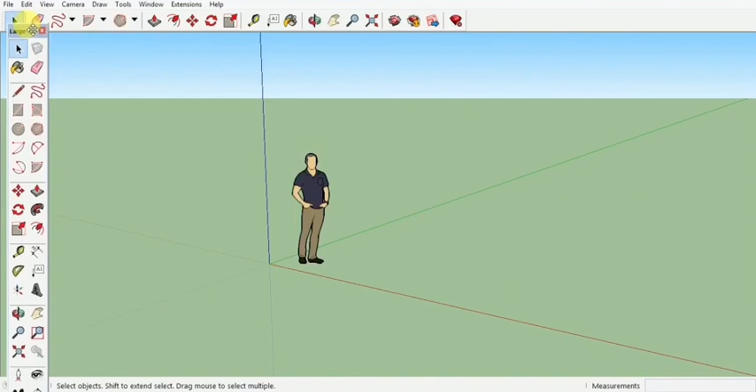Before I get into it, you'll notice this panel is not yet docked, meaning it's still free to move around. To dock it, we move it to the side and you'll see how it fits easily. This is how we dock it so we can work in it rather than it moving around everywhere. If you want to change its docking position, you can see these lines we have. We can hold it from the line and dock it anywhere else, either on the left side or the right side.

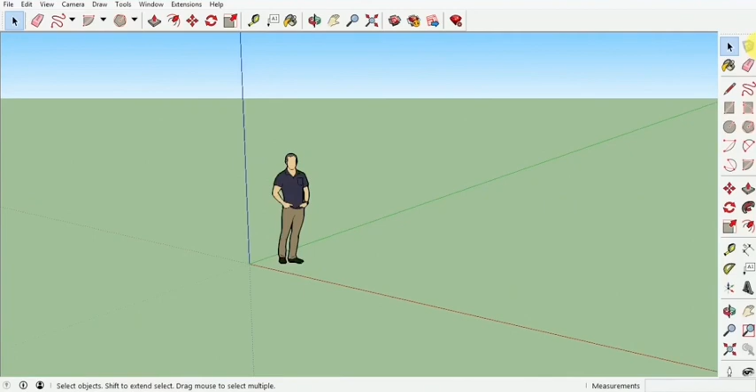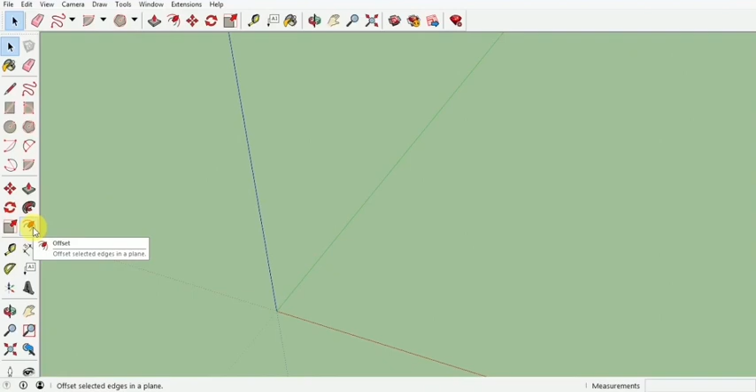Once I've finished docking it, we'll get into what the next tool set is about. I'm going to delete this person from here and get straight to the tool set. The first one here is basically the move command, then we have push pull, rotate, follow me, scale, and offset. For this, I'm going to use a rectangle, creating a random one so we have an object to work around with.

Now the first command here is the move command. The move command will let us move this object or shape around.

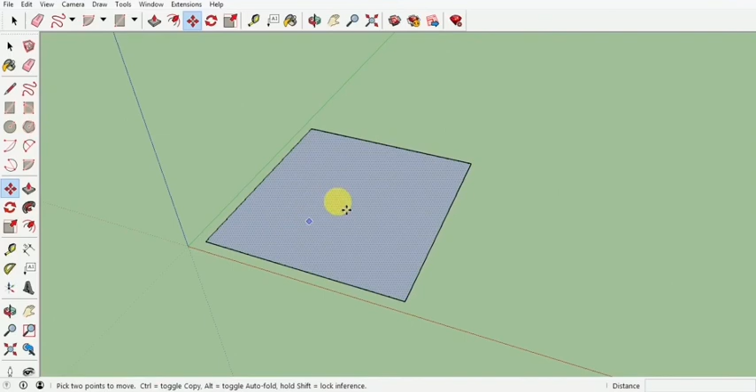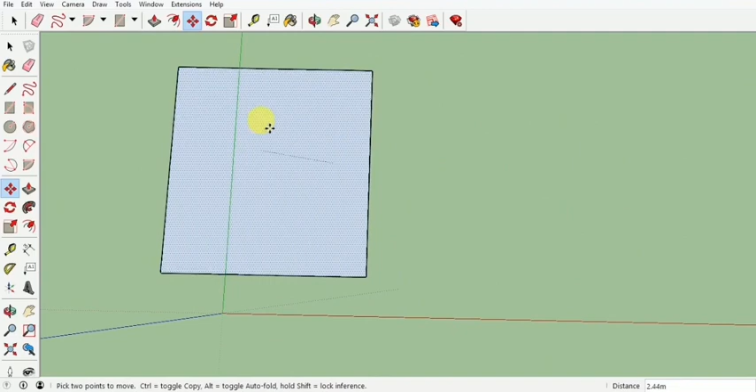You have to understand a couple of things when using the tools for a particular method. If we move this shape from the surface, the entire shape will move. But if we move it from one of the corners, the entire shape will not move, only that corner and the lines touching it. If you've understood this, the surface is touching all the edges, that's why the whole surface moves together. But when moving from this edge, the edge is only touching the surface as well as both those edges, so only the edges touching it are actually moving, and your form starts to get deformed.

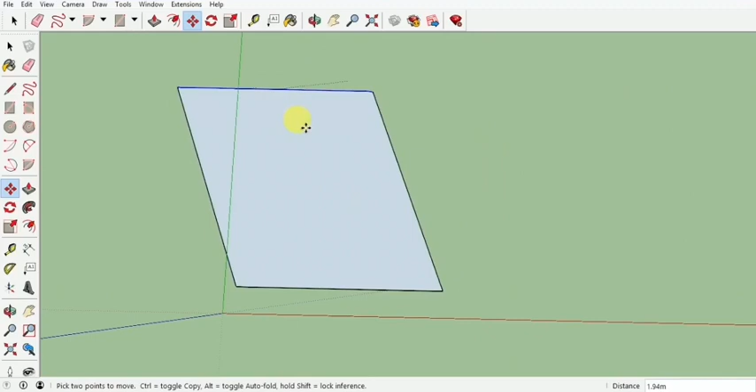If I move it from this line, then only this edge will move along with the two edges touching it as well. This is what we need to understand before moving something. So we can select with the select tool the whole thing so it's completely highlighted, or do a double click selection on top of the box, then move it from wherever we want. That would be a proper movement. I hope you've understood how to move this around.

The next thing we're going to learn is how to copy. We've learned how to move this, now we learn how to copy it. Remember, while moving it, we can always select the axis keys to move it in a particular direction, and we can use a particular distance also, let's say 5 enter, to move it 5 meters.

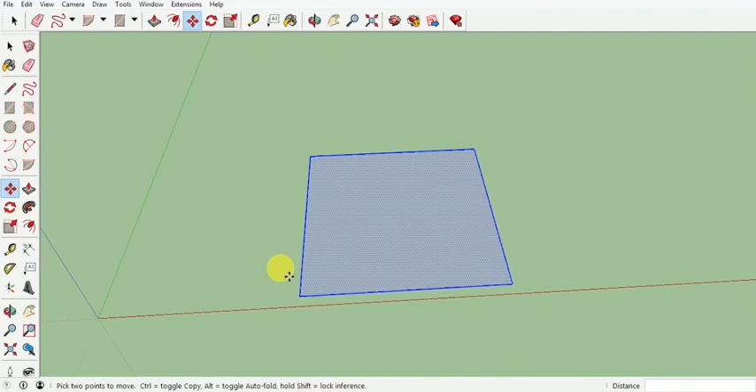To copy it, it's exactly the same as move, using the axis and giving a dimension, but for copying we press Ctrl. When I press Ctrl, you'll notice there's a plus sign there. We don't need to hold Ctrl, there's a difference between holding and pressing it. Holding Ctrl holds it down, but pressing Ctrl just switches it off and on like a switch. So I can press Ctrl, and when I see the plus sign, I can select it from any point I want to copy, let's say from here, and copy it to this side or to this side, like this.

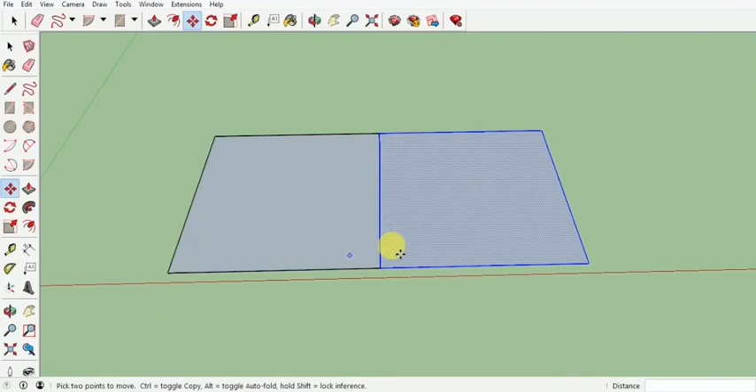The minute it's copied and I set the copy, you'll notice it copies on this side. I'll do that again, and again, so you can see I've copied it 4 times now below. But if we can copy, we should also be able to array.

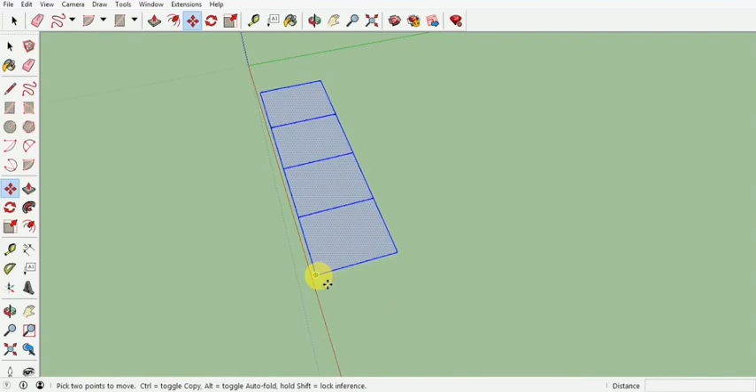Array is basically copying a specified number of times by giving a count. So I'm going to select all 4 of these rectangles, and using the move command, I'll first press Ctrl and copy it. The first step to array is to copy it, which means setting a distance for it. You can see 6.29 is the distance I've set.

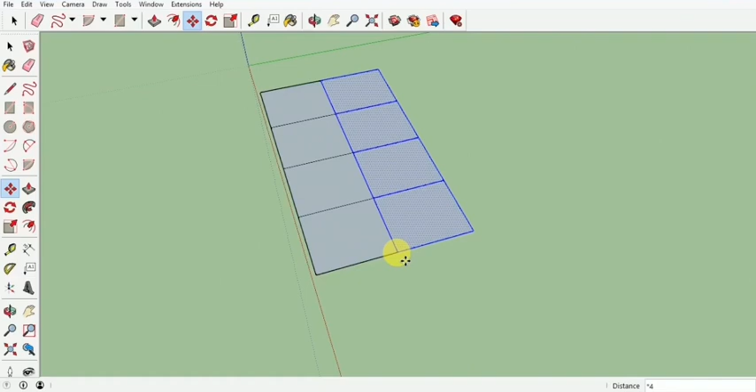The minute I click, I won't do anything else, but I'll press star. So down at the command line, on the distance command, I've put in star, then 4 - the number of times. This 4 can vary, anything from 1 to 100, 200, 1000, anything at all. But I'll put in 4 here and press enter: copy, star 4, enter. Automatically you'll see how this arrays.

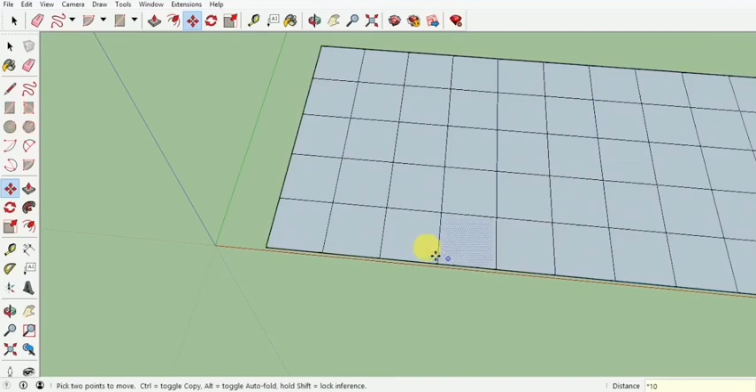It's very easy, it happens after you copy it once. So once you copy, you set the copy down, and you'll see that again: select, Control, set the copy down, then press star, number of times, enter. Automatically we'll have multiple copies like this. That is basically how you array.

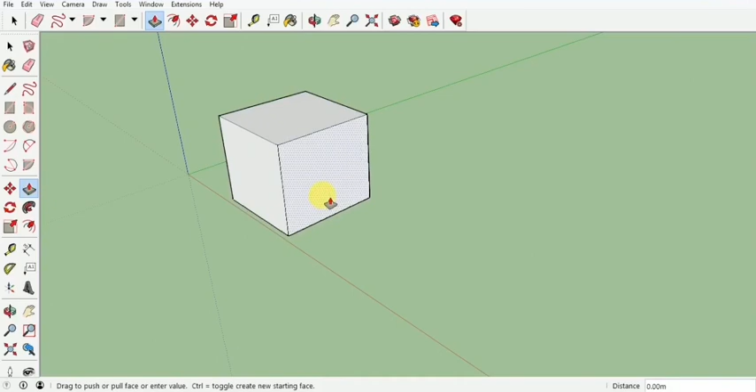So from the move command, we can not only move, but we can copy and array. The next command we have is the pull push command. The pull push command will let us pull or push left, right, any straight surface that we want, in any direction. This will help us create a 3D model or a 3D block to work with in our 3D environment.

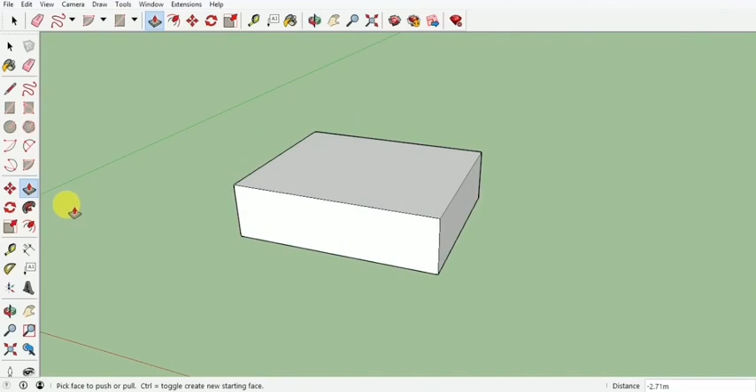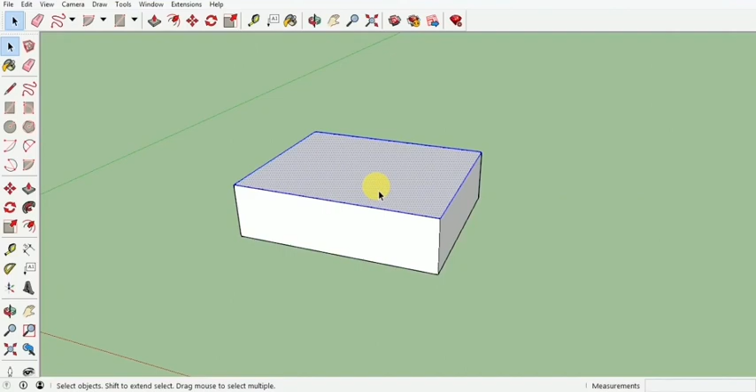Now that you've understood this, let's see how we can move this block. I'll use the same move command, but remember, just like the plane, if I try to move it from any one side, it will start to get distorted like this. So the only way to do this is to either make a box selection over it, or use a single click to select the surface, a double click to select the edges along with the surface, and 3 clicks to select the entire object. This is how you select the whole object.

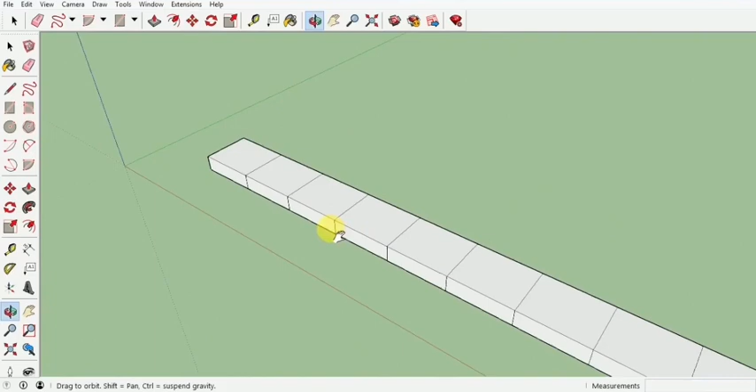Once the object is selected, we can move it in any direction we want. We can copy it, and after copying I can just put in star, number of times, and enter, so we'll have an array copy. This is basically how you move, copy, array, and use the push pull command.

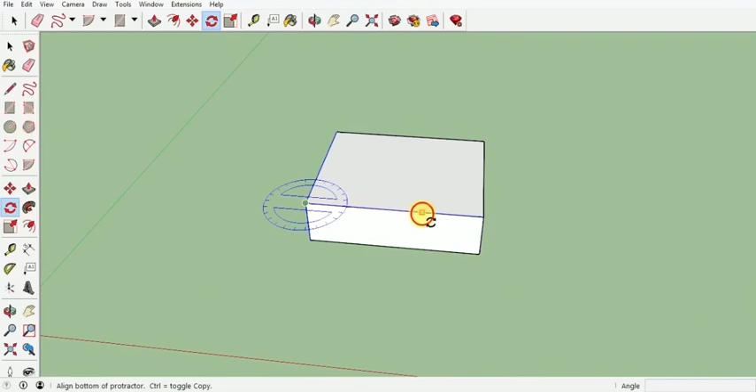The next tool here is the rotate command. I'm going to rotate this block. Again, remember, if I try to rotate it from any one side like this, it will start to get distorted. So obviously I need to select the whole thing, then select the rotate command.

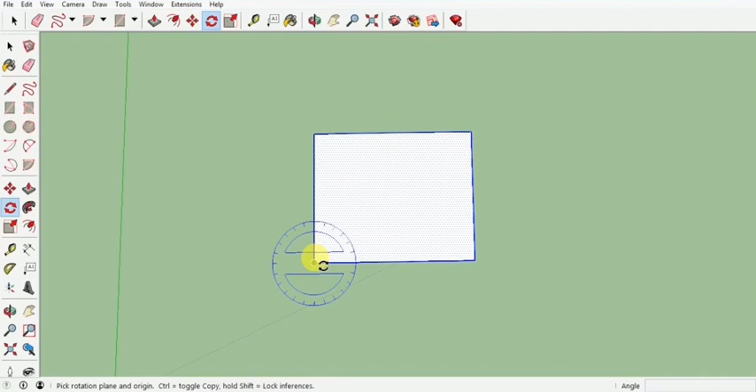Before we get into exactly how to rotate, remember rotation needs 3 points. One is the axis of rotation, which is the first point. Second is the point which we use to rotate. And third is the point till where we need to rotate it. So I'll use this as the axis of rotation, and I set my axis.

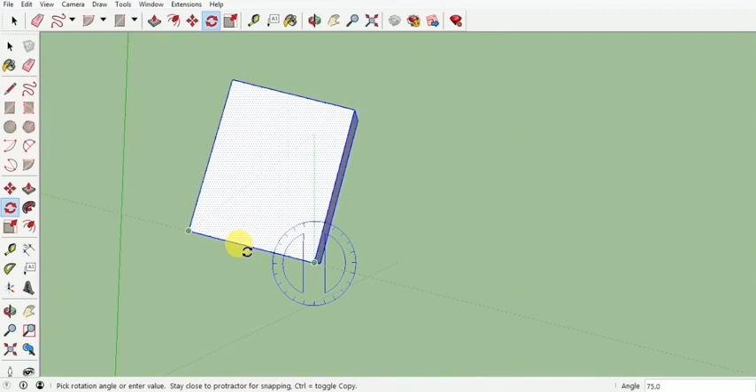Second, I want to start rotating from this point. And third is where I want to rotate it to, or at what angle I want to set the rotation. So let's say I set it at 75 - you'll notice how this has been rotated 75.

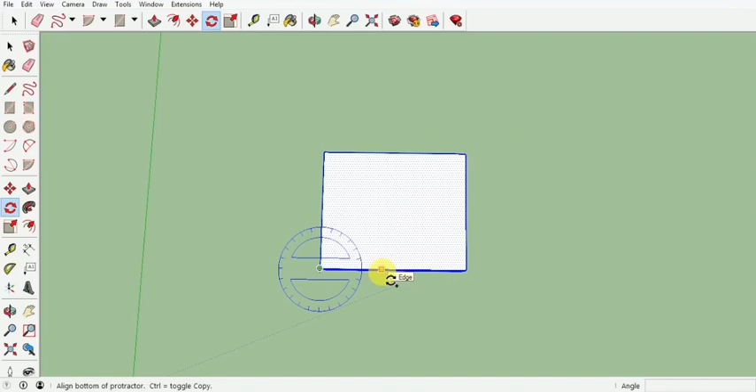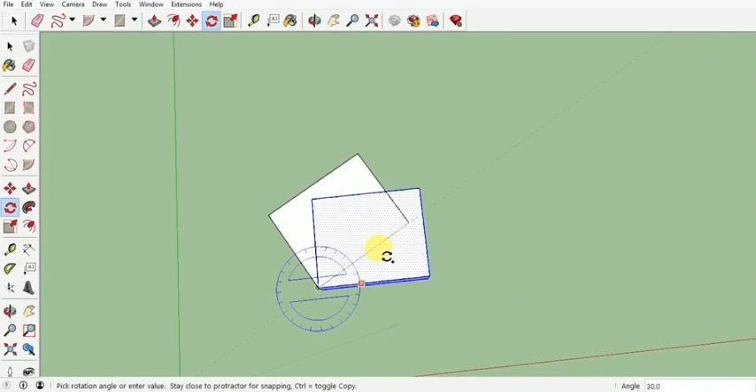Now obviously we can rotate with this, but if I press Control, you will see a plus sign showing up near the rotation command. So Control will switch it on as well as switch it off. And if you know what a plus sign does, that's correct, it lets us copy. The minute I copy it at whatever angle I want, right now I've used 90 degrees, I can press star 3, enter, and I'll have a rotate array. I can even select the whole thing and rotate it at a lesser angle, let's say 30 degrees, star 20, enter, and I'll have 20 different boxes rotated like this, joined into each other.

So this is how you will use your rotate command, not only for copying, but even for a rotate array.

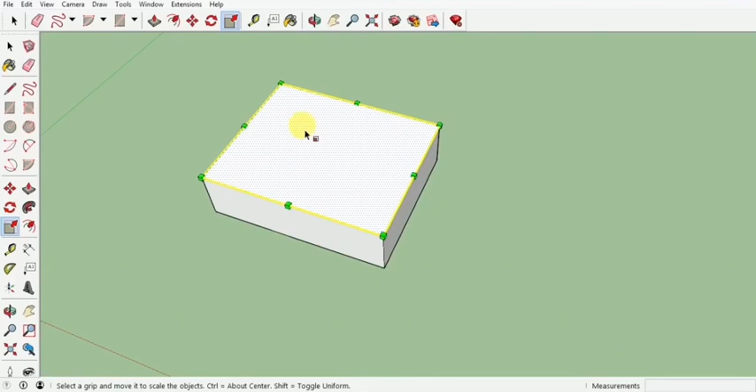Okay guys, so the next one over here is Follow Me, but this is an entire 3D creator on its own, so we will come to this in the next topics. Let's talk about Scale. Scale basically lets you select a particular surface and you will have scale options on all sides, and you can scale it in any way you like.

But as you can see, only the top portion is getting scaled, so it's getting distorted. If you want to select the whole box to scale, you'll have to select the whole box and then press the scale button, so you can now scale it.

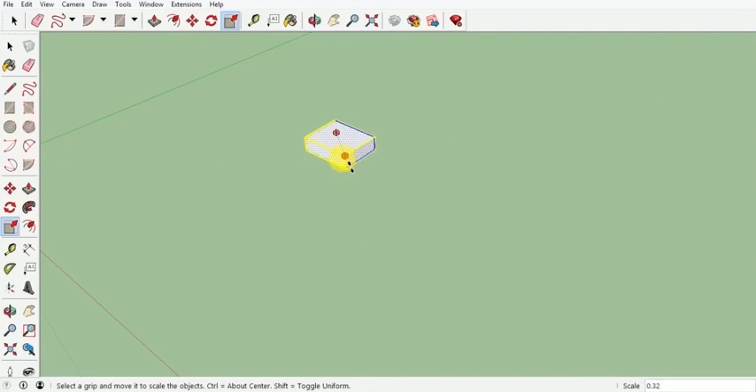Now understand, scaling from the corners basically means a uniform scaling, and scaling from the sides will give you non-uniform scaling like this. If you scale from the top portion, you'll get a height scaling, and if you scale from the sides again, you'll get a non-uniform scaling.

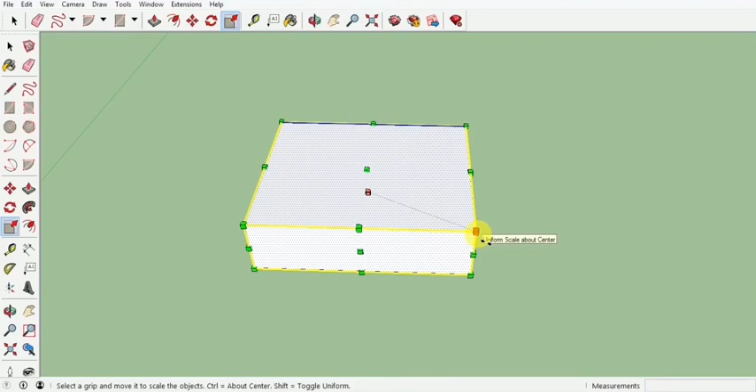Let's say you press Ctrl and you scale, you'll see it changes from this side to the center, which means you'll get uniform scaling in all directions by pressing Ctrl and scaling. So this is how the scale option will really work.

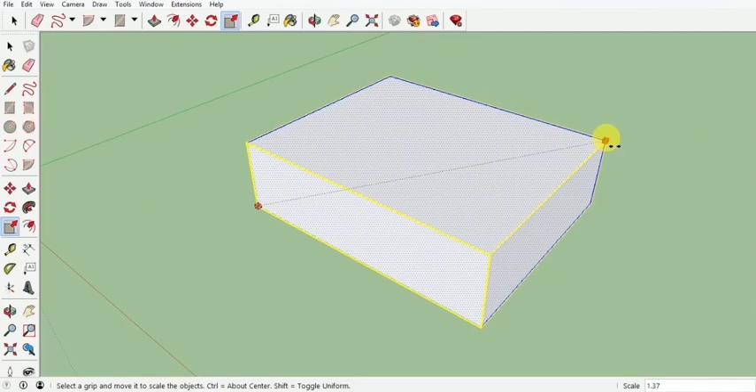Now if you want to scale it, let's say 3 times, I'll scale it from the side, and down on the scale you can see in the measurement area I'll put in 3, enter. So it will automatically scale 3 times bigger. This is how the basic scale command is going to work.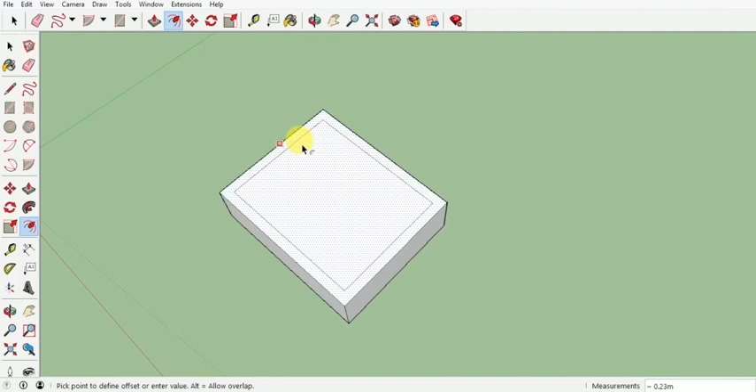The next command over here is the offset command. For the offset, do remember, offset basically means to copy the surface inside. So we'll be selecting the surface and we can pull it in or pull it out. Let's say I pull it in this much, you can see how it has now created another surface with a particular distance.

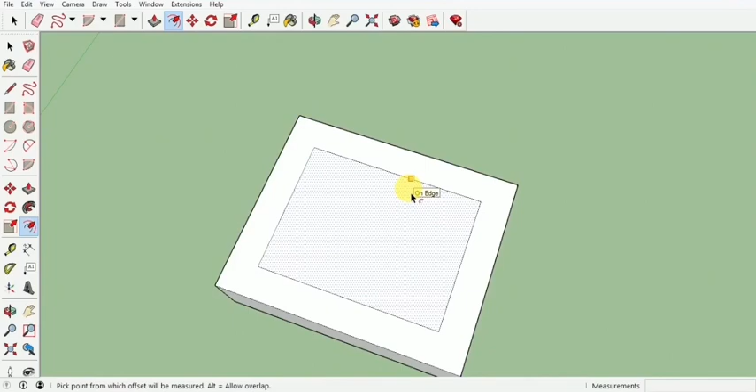Now we can even set that distance. While I'm pulling it in, I can leave the click, and down you can see 0.23. I can change that to, let's say, 0.5, enter, and we'll now have an offset rectangle inside. I can use the push tool to push this portion down and pull this portion up like this to create a hollow surface.

Now do understand, if I delete this surface, it is still hollow inside, because SketchUp creates everything hollow. There is no filled portion inside, it is all hollow. So we just build according to the hollow portion, and we use material and textures to actually create good looking models, which we'll get into in the next topics.

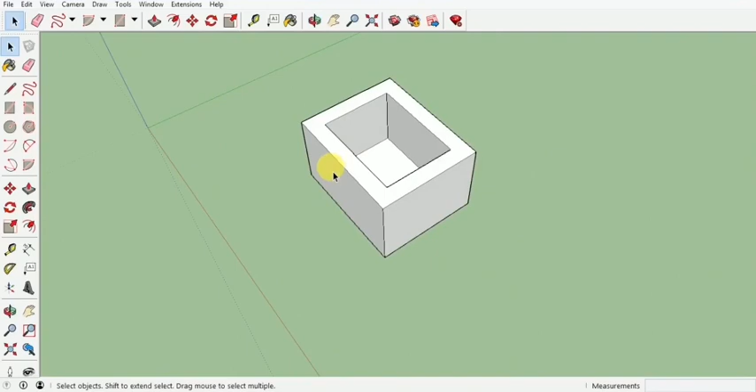Whatever we have done today can be done to a single surface as well, or even to a circle. You can see that I can offset the circle, I can select the circle and scale it as well, and I can push the circle up as well.

You'll notice that there are 2 different colors as well, the blue and the white. These are our default colors, because as SketchUp is creating surfaces while we are working, it has to provide a certain material, but it will not provide any specific color or texture. It will only be providing this particular default material. So we'll get to this in the next topics as well.